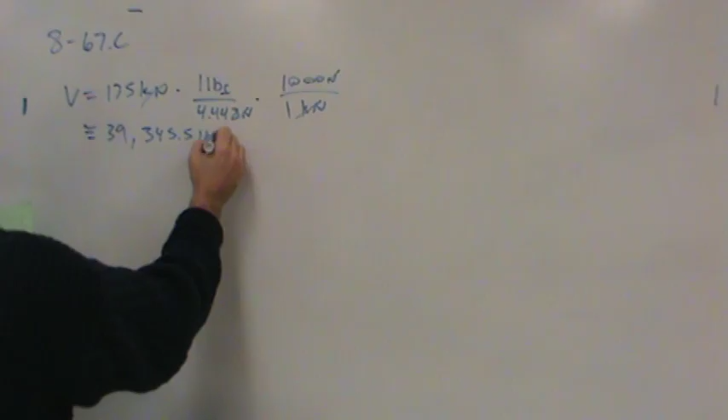Here's the easy way. There's 1,000 newtons per 1 kilonewton. I know that's trivial, but it just avoids a dumb mistake of flipping these two. So that way kilonewtons go away, newtons go away, and I know I've got pounds force and I don't have to concern myself anymore with it. Okay? So anyway, the load comes out to about 39,345.5 pounds force. So there's the shear load.

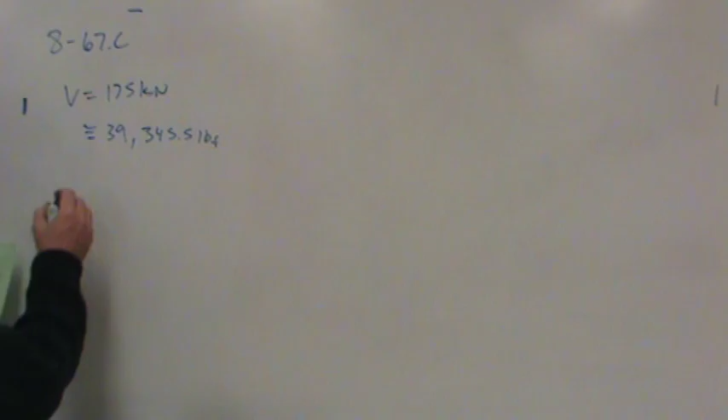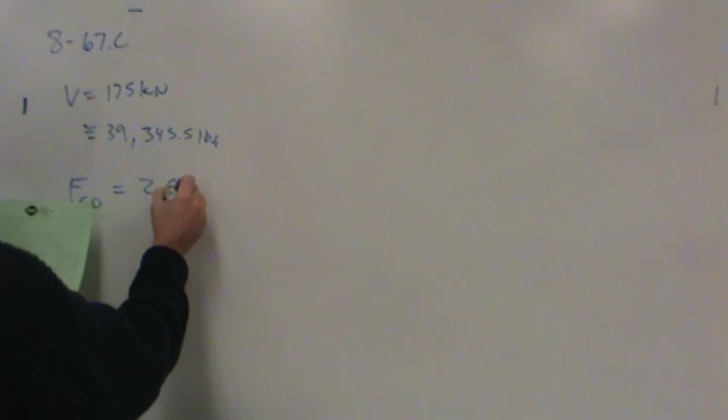All right, now also your author actually has a symbol. I don't know why he uses SD. I think S is for shear. D, I have no idea where that came from. Well, I do have an idea. I think it's across the diameter of a fastener, but I'm not sure about that. Anyway, this is the symbol he uses for how much shear load a fastener can take. Okay, so I'll just write it down in pounds force per rivet.

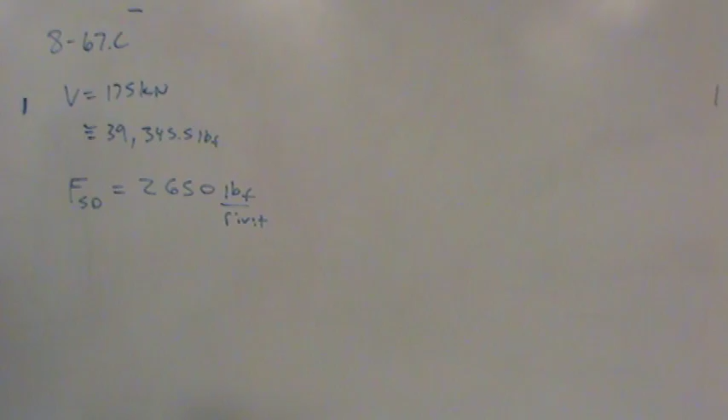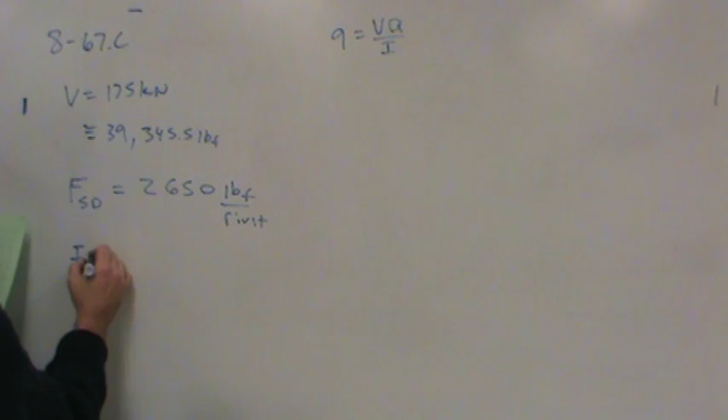Now, again, I went into Excel and calculated the cross-sectional properties, the area moment of inertia, as well as capital Q. We'll check and make sure I got that right, but I think I actually did that one right. Let me write down what I've got, because of course we're going to need the shear flow. The shear flow will be VQ over I. So we're going to need the area moment of inertia anyway. The total area moment of inertia came out to 831.3633 inches to the fourth.

The average position, if you look at that figure, it should be on page 450. If you look at that figure, where do you think the centroid of that whole area is? In the center. Right, just in the middle. This is a symmetrical section. So it's just halfway up. How tall is that beam? Wide flange 14 by 43. Well, the 14 is how tall it is. So how tall is it?

You'd think 14 inches. That's not the case. It's 13.7 inches. You actually have to go to the back of the book and look it up. Okay. So be careful when you're using these cross sections. The 14 is a nominal size. Okay, it's 14 inches nominally tall.

What do you think the 43 stands for? That's how many pounds per foot it weighs. Okay, so it's kind of nice to know that, that's the cross-sectional properties. Those are good to know. So all the standard sections are listed that way, where the first number is a particular dimension, and then the next number is the weight per foot. So 43 pounds per foot. Anyway,

so to calculate the area moment of inertia, my whole point in that is that the center of that area is not half of 14 inches. Okay, it's different than that. Of course, I've got to add in the thickness of the bottom plate, but I did that here, so that should be the result. So here's the centroid, here's the moment of inertia. I should write that down for the video. 7.35 inches is then the center of that beam.

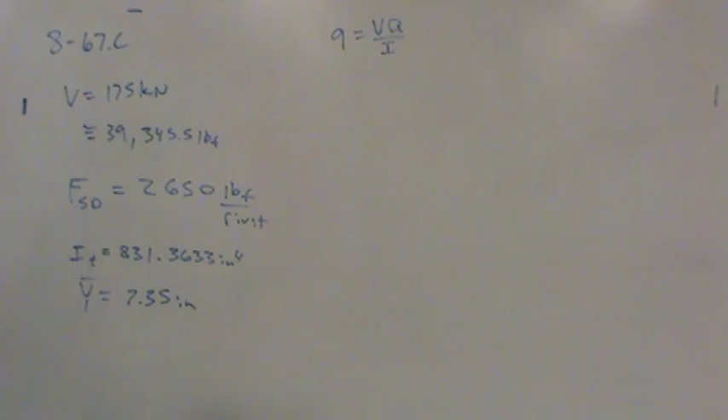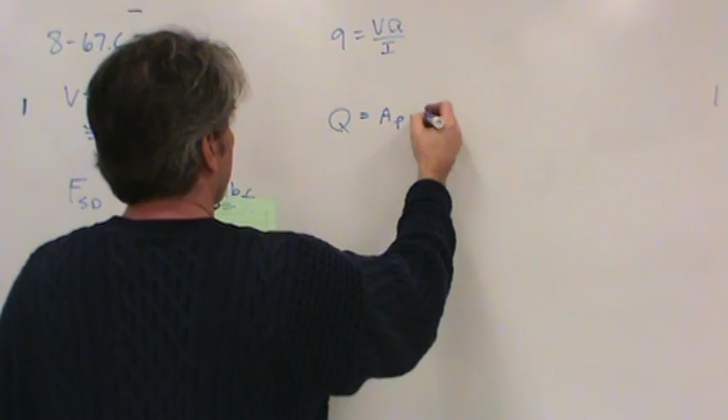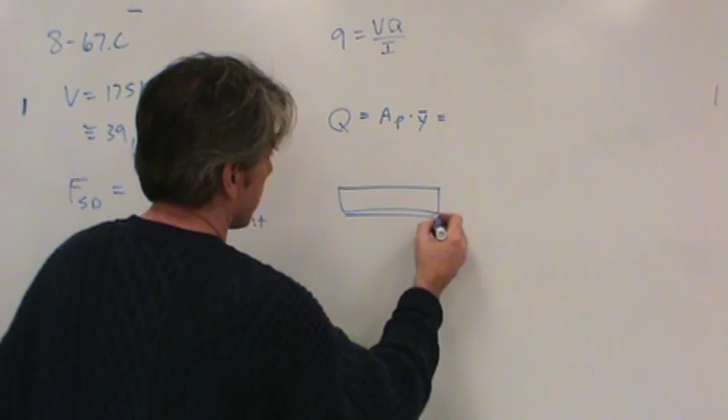Okay, but what about Q? Well, to get capital Q, I'll write it out on the board, even though I performed the calculations in Excel. That way we can make sure I did it all correct. Anyway, to get this, I need a particular area. What's the particular area? Well, here's the cross section. Here's the beam. I don't remember if it's a W section or an S section. But the particular area I'm interested in is this area.

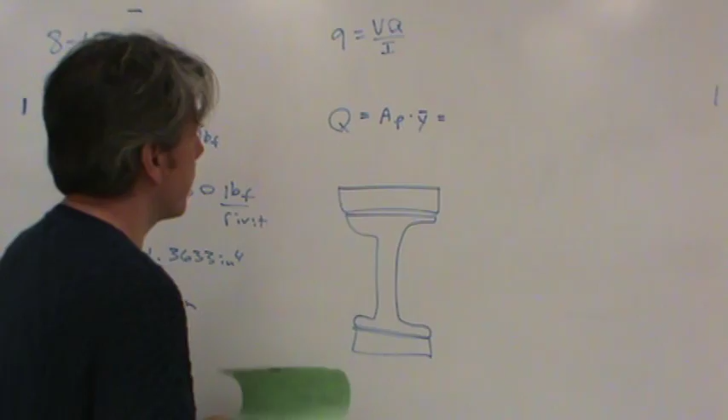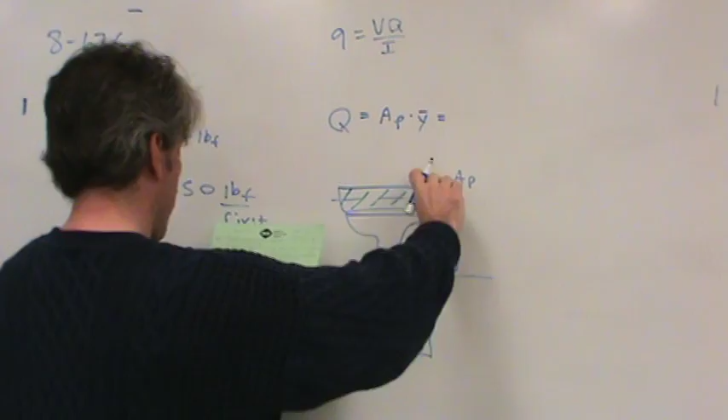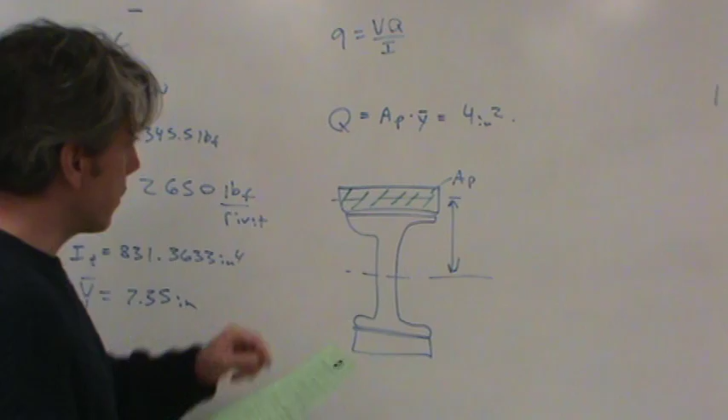So I need the height from the centroid of the overall shape to the centroid of that particular area. Okay. The particular area is pretty easy to see, right? The particular area is just a 1/2 inch times 8 inches, so that's 4 square inches of area. But Y bar would be the distance from here up to here. So if this is a 1/2 inch thick, then I should have half of 13.7. And then I have to add to that 1/4 of an inch.

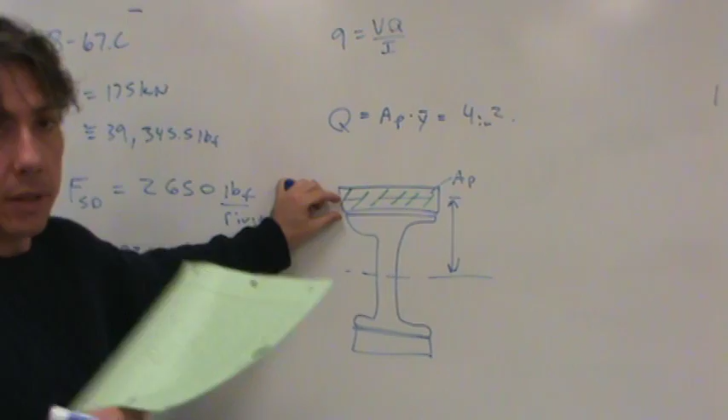And I didn't do that right, so I'll have to modify my work here on the page as well as what I've got in Excel. All I did was I took half of 13.7 because I wasn't thinking right. Actually, I took half of the overall height and then subtracted 0.2. Wait a second, why 0.2? I've got a lot of things around here. This looks like the information from the last sheet. Did I not change this? I know what happened. I did my work on paper.

Well, that's okay. So the total area of the particular area is 4 square inches because it's 8 inches wide and a 1/2 inch tall. And then the height to that, this would be the distance from the centroid up to here. I would need half of the height, so that would be 13.7 over 2 plus 0.25. You guys see why it's 0.25? Because that's half of this height. It's 1/4 inch. So then there's Q, or there's AY, which is Q. And I don't need that.

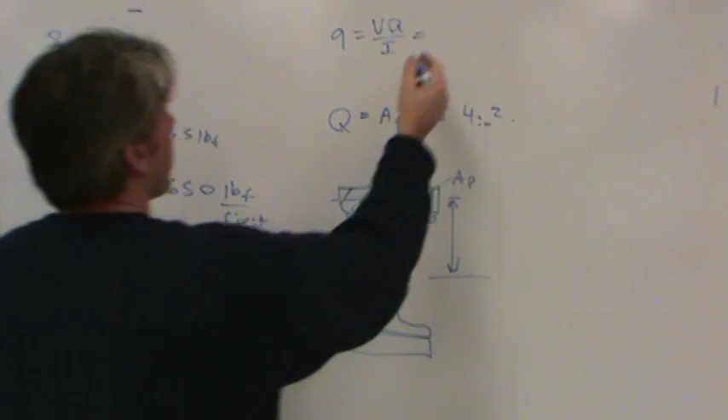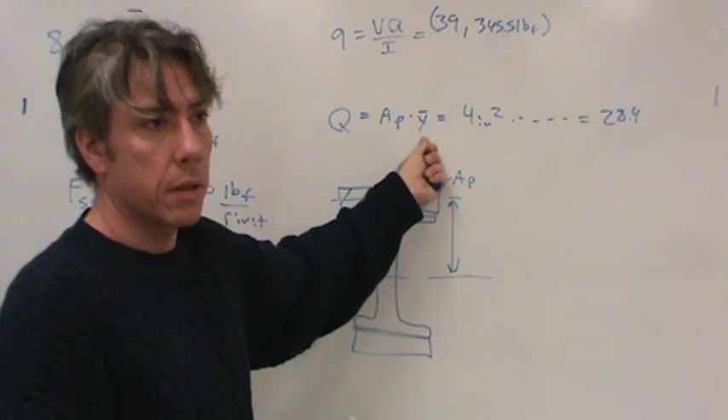Okay. And so then the shear flow should be the load, which was 39,345.5 pounds force, multiplied by Q. I didn't finish this off. We've got it in Excel. Let me jot it down for the sake of the video. That came out to 28.4. By the way, what are the units? Well, it's area times length, so it's inches cubed, or length cubed. Not a volume, but it is a length cubed.

So 28.4 cubic inches. Divided by I, and I was 831.3633 inches to the fourth. And let's see what we get. I'll plug this into Excel and let it do the math for us. So let's see, 39,345.5. And then multiplied by E12, that's Q, divided by H6, which is I, so that should come out right. So there's the shear flow. What are the units of the shear flow? Yes, sir. Not quite, almost.

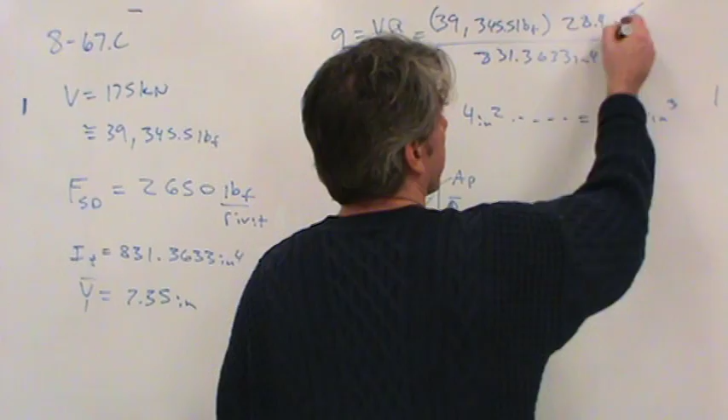That cancels with all but one. So it's pounds per length, right? Or pounds per inch. It's pounds force per inch. Okay. Now, we really are not interested in the shear, so I'm going to eliminate that line in the spreadsheet. Save this before I forget it too.

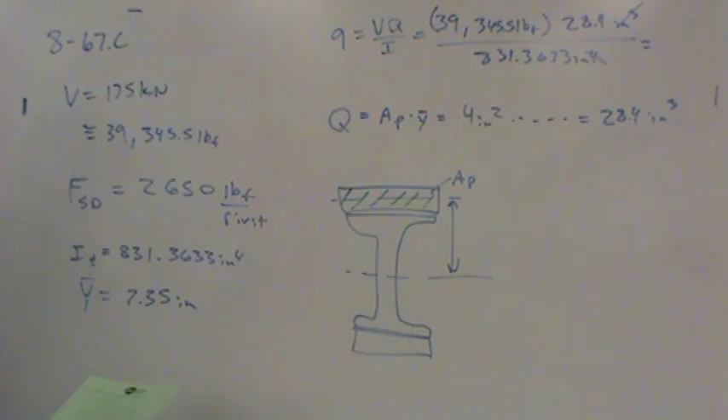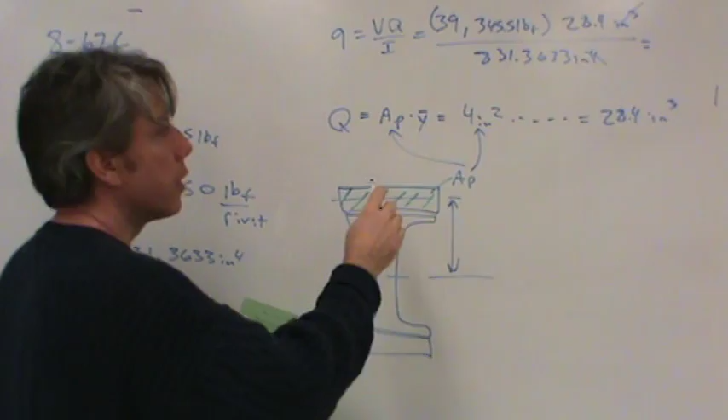What we're really interested in is the maximum spacing. Well, we have to be careful here, yes. Can we go over Q one more time, please? Sure, which one? This one? Yeah, big Q. Okay. So see this particular area here? That goes in right here. You can see that's 4 square inches, right? Okay. Y is that distance.

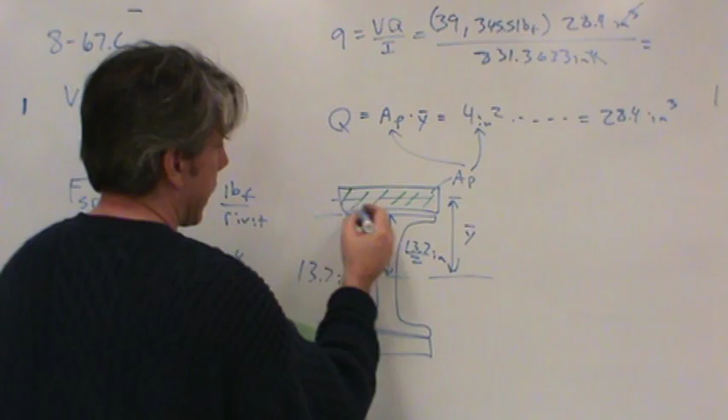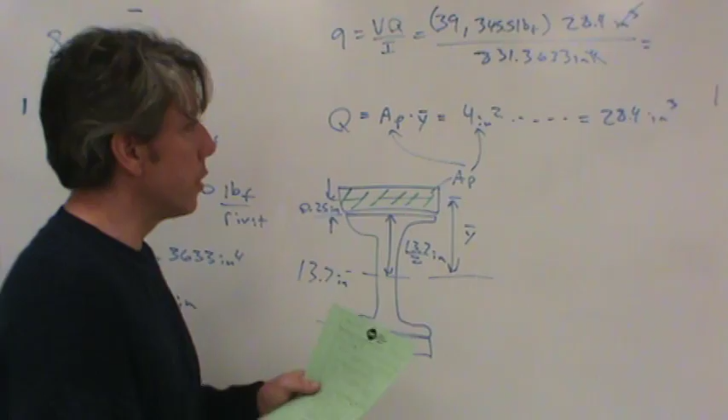I know that this is 13.7 inches. So I know this is 13.7 over 2. And I have to add to that half of that inch thickness, right? Because this is a half an inch thick, I need half of that, so 0.25 plus 13.7 over 2, that was Y bar, and that came out to whatever we had in the spreadsheet, so 7.1.

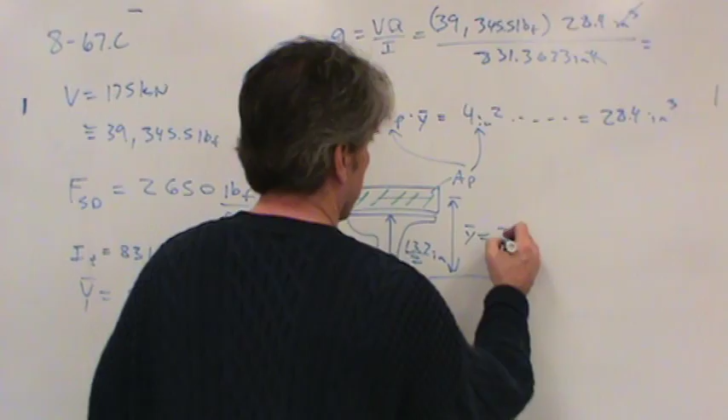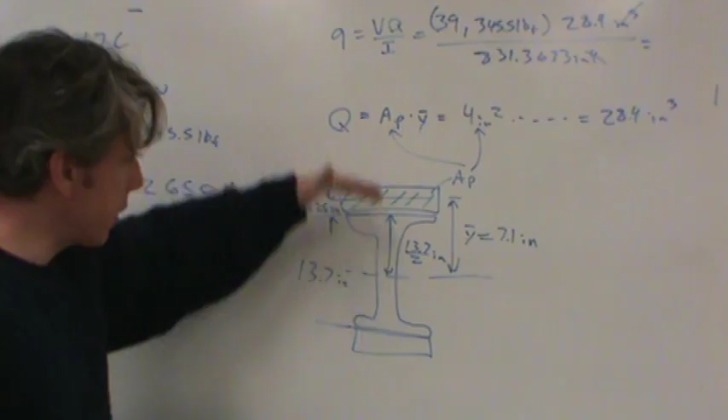AP is just the area of the top piece that you have shaded. Yeah, it's just the area beyond the axis where I'm interested in the shear flow. All right, anything above that? Everything above that. Yep. Good question. Any others? Did I do something wrong in the spreadsheet? Does it come out?

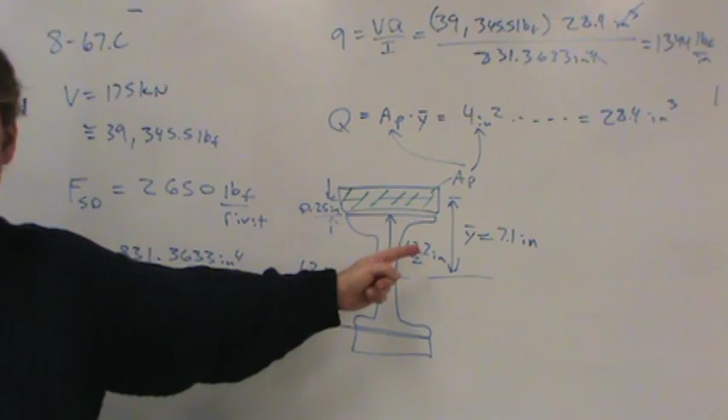So the shear flow came out to about 1344 pounds force per inch. Okay. Now what is that? Well, that's the load that each inch of length has to take. Now, how many fasteners are we going to put along the length? We're going to put 2 side by side, right? So we could think of this really as 2 times this, because we're going to have 2 fasteners at each interval length. Does that make sense? However far we space them apart, really we're going to have 2 fasteners.

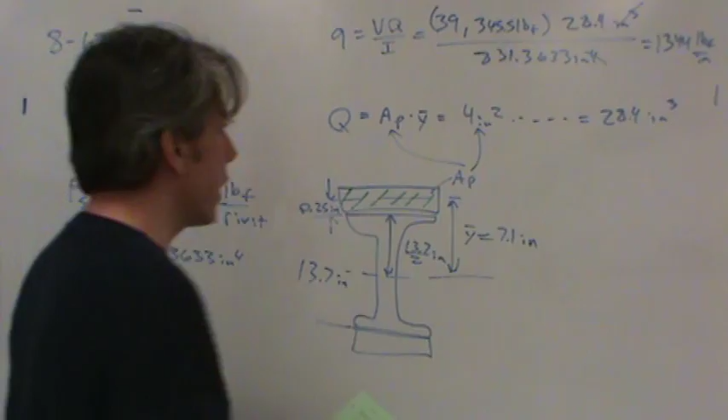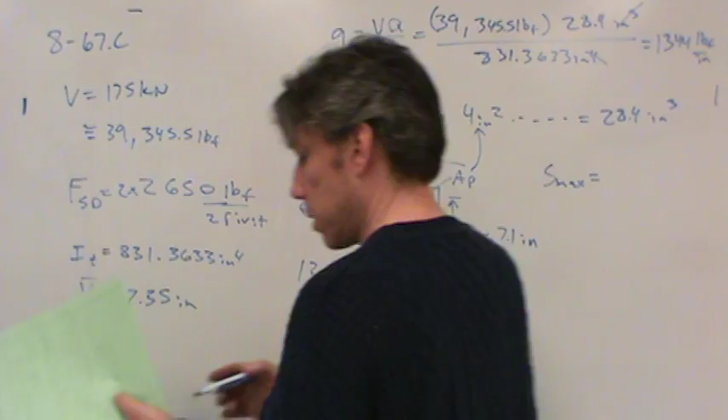Notice this is the amount of load that can be taken by each rivet. So this is per 2 rivets now. And we're going to put rivets side by side along the length. So when I calculate from equation 8.22 the maximum spacing along the length of the beam, then I'm going to take really 2 times this. So let's just do this in the spreadsheet, because the numbers I've got are slightly off.

FSD. Oh, that's great. Let's try this. I guess a bad joke there was that's Greek to me. Okay, FSD.

Okay, that really is 2650, and that's pounds force per rivet. And since we're going to have 2 rivets at each length S, the total spacing S, or the maximum spacing, would be 2 times FSD divided by q, the shear flow. Okay? So let's see. So 2 times FSD divided by q.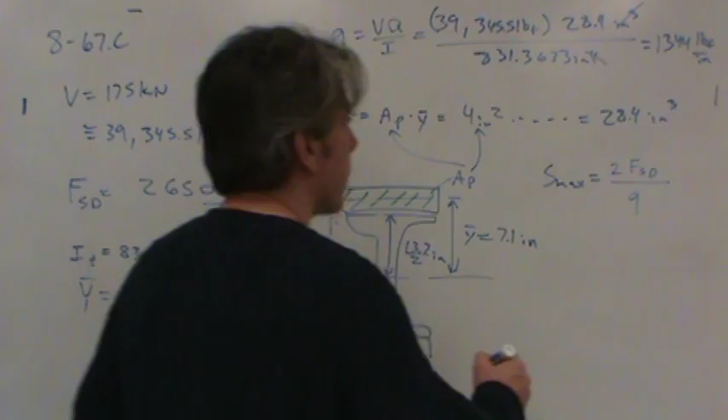So could we space them every 4 inches? 3.94 is the result. The number here is 3.94 some odd inches. Could we space them every 4 inches? Would that work? No, this is the maximum spacing. We have to have something less than that. So what would you recommend? 3.5. 3¾. I'd probably space them every 2 inches or less. Does that make sense? Questions?

Let me jot down the units here. This will just be inches. And really this is S max. So we could have an S specified. Just put really whatever we want. We could put 3 inches if we want. Okay. Anything else?